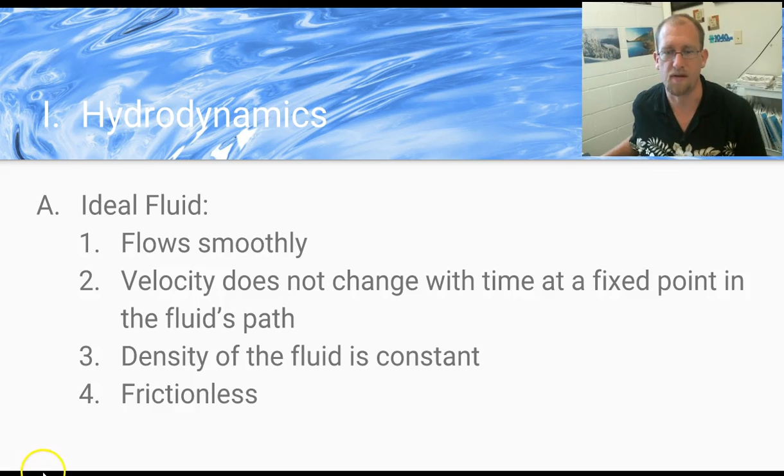We need to talk about types of flow. A streamline is a fictitious way of thinking, a model of how fluids flow, where we're going to draw some lines and say particles of the fluid move along these lines. Well, in truth, the particles of the fluid may be going all kinds of different directions, but we're going to draw lines for where the fluid particles flow, and we're going to call those streamlines. They don't exist, but they help make hydrodynamics easier to study.

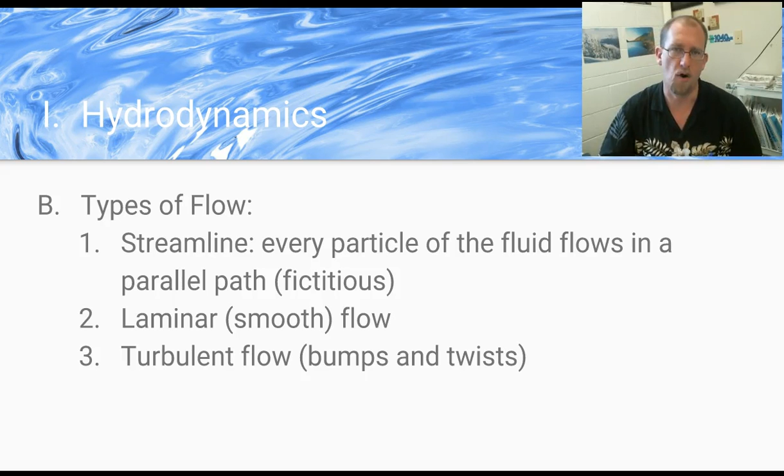When we talk about flow continuity, this is an important concept. Because an ideal fluid is uniformly dense and it doesn't have any gaps in it, it completely fills its container, right? If something is moving with a certain volume per minute past a point in a pipe, we're going to assume that everywhere in that pipe it's moving at the same volume per minute, because otherwise you would have water compacting at some point where it slows down, or water thinning out at some point as it speeds up. And it doesn't happen that way when a fluid moves uniformly. And so we have this principle of a continuous flow. Now there are some fluids like air where air can pile up or thin out, but liquids can't do that.

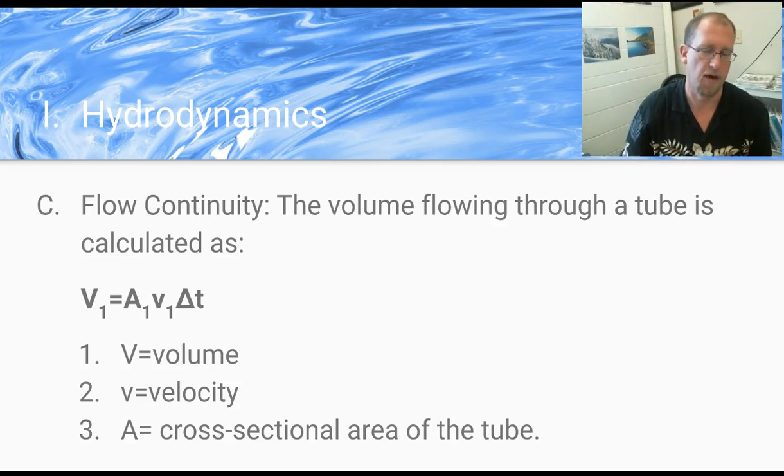And so this is very much like the volume of a cylinder or the volume of a prism. If you have the area of the base of the cylinder and its height, you know its volume. Similarly, the area of the pipe and then the time and the speed represent kind of the height concept. If you have the cross-sectional area of the tube and how fast things are moving through it, you can get the volume of water or the volume of air or the volume of something that has flown through the tube in that amount of time. Okay? Take a moment and look at that again if you need to understand it a little bit deeper.

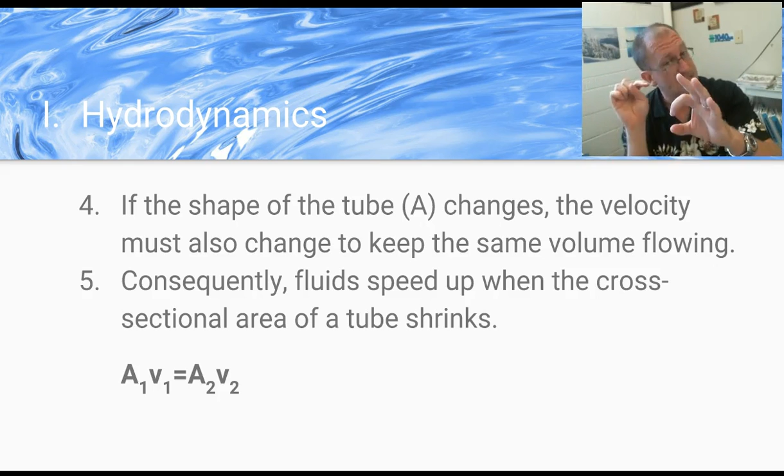The shape of the tube does not control the volume. So again, think about the fact that it's the same volume of water moving through the tube. If the tube is bigger, then the same volume can move slower. Think about that for a moment. You have a little pipe and a big pipe. Same volume of water moving through. The volume of water is going to move slower through a big pipe. It's going to move faster through a little pipe because the same volume has to get through a smaller space, but the same volume through in the unit of time. So it's going to go faster.

So the shape of the tube does not control the volume. The volume still moves. It controls the velocity, how fast it moves. The velocity will change to keep the same volume of water flowing. Consequently, fluids speed up when the cross-sectional area of the tube shrinks. So, got a formula for you.

The area on one part of the pipe times the velocity of the particles, the average velocity of particles at that point in the pipe, is equal to the area of a pipe in another place. Maybe the pipe has changed size, times the average velocity of the particles at that point in the pipe. So if I have a big pipe, I can have a small velocity. If I have a little pipe, I need to have a bigger velocity in order for them to still equal the same thing. Okay? All right.

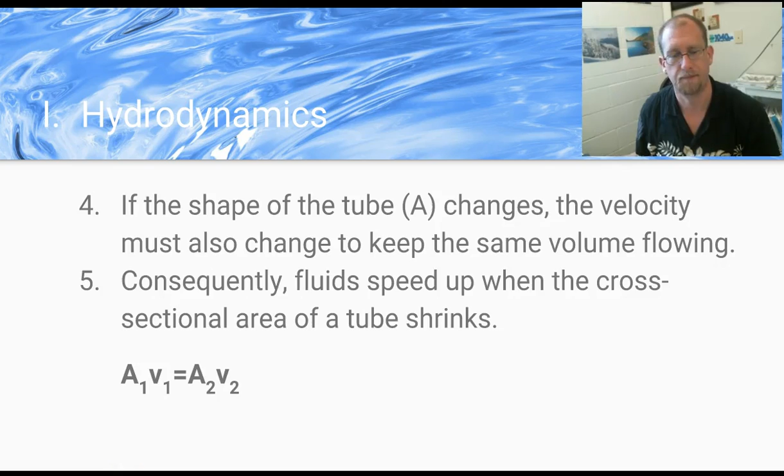I love potato cannons. I wish I could shoot a potato cannon with you. I was told by a police officer that I would go to jail if I did that, so I haven't done it here. But back in Arizona, where nobody cares if you fire potato cannons, I did it all the time. It's an awesome thing to do. You should go to Arizona and shoot a potato cannon too.

But in a basic potato cannon, there's a firing chamber of a larger dimension than the barrel to maximize the acceleration of the flow of gases against the potato. So the goal is to get this potato out the barrel of the gun really fast. I'm going to accelerate some gases in here by having an explosion, and then I'm going to make the gases go even faster by having the barrel be smaller than where the explosion was.

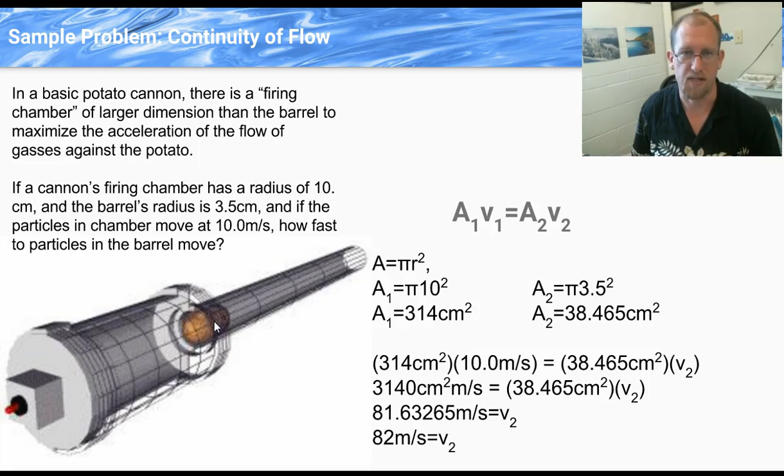So 82 meters per second is the velocity of particles in that barrel, which will turn into the velocity of my potato. 82 meters per second. It's a pretty awesome potato cannon, and that's typically the kind of stuff you get. Okay?

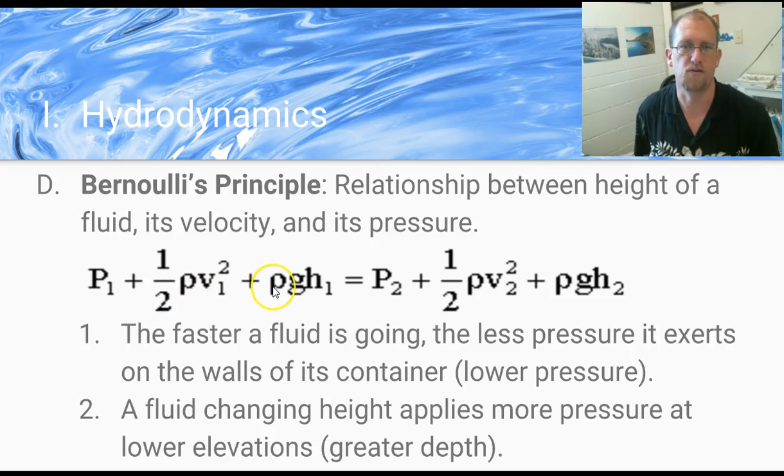Now you could of course change velocity and pressure at the same time, velocity and height at the same time, and I'll show you an example of that. But usually when you use Bernoulli's principle, you're going to be only fiddling with one thing and not the other. And so you can actually ignore one of these terms. If I give you a problem and the only thing that I am telling you is that the height changes, then you can just forget about the velocity term and just look at height and pressure. Or if I give you a pressure problem and tell you that velocity is changing but not height, you can forget that term, okay? So usually you don't have to mess with all three at one time. Let's look at an example.

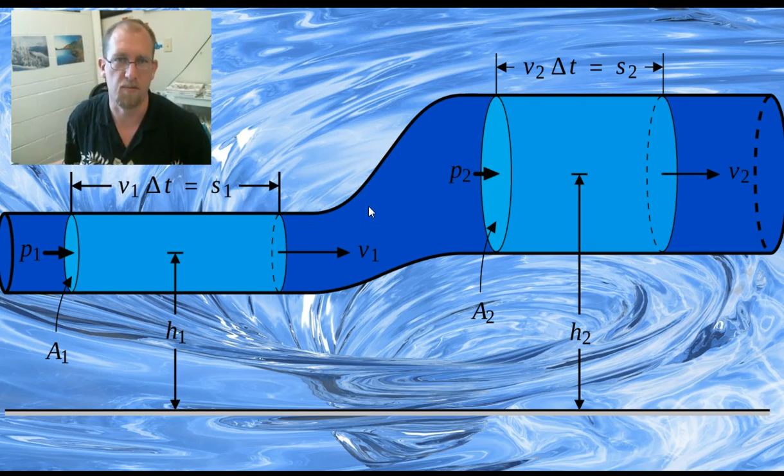Here we have an example where fluid is in a certain diameter, a certain cross-sectional area, which then we will be able to use to figure out its velocity, right? So I have the velocity information here, and I have the pressure at this point in the pipe. And then the fluid both rises and gets bigger. When it rises, pressure is going to drop. And when it gets bigger, pressure is going to rise because the speed slows down. So all of those things you would be able to throw into an equation and manipulate using Bernoulli's principle. Okay? That's the kind of stuff we're going to be doing.

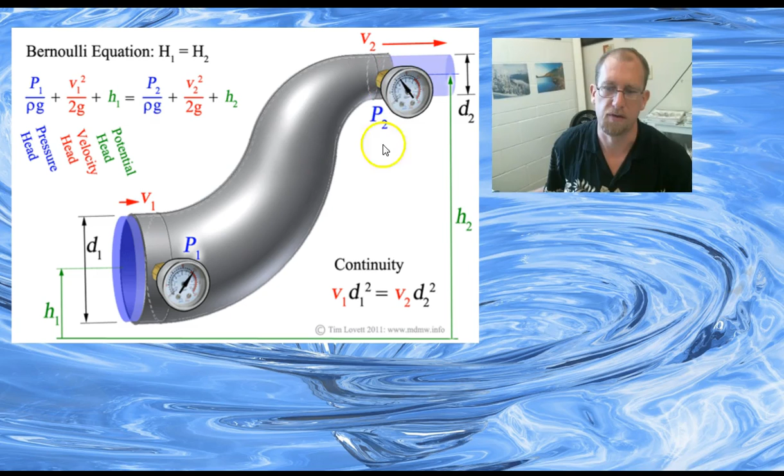Okay, Bernoulli's principle. This plays into lift. So fluid dynamics has a lot to do with airplanes and spacecraft designs and things of that nature. Because of Bernoulli's effect, fluids forced to go faster create areas of low pressure, and those areas of low pressure can be used to draw materials into that area of low pressure. Okay, so we have wings on airplanes, and the general idea of a wing is that it creates a vacuum above the wing that sucks the airplane up into the air, and that's why it can fly.

And that has to do with Bernoulli's principle. Okay, any device which generates lift in air is called an airfoil, and in a liquid we would call it a hydrofoil. It's the same thing. So I'm going to demonstrate Bernoulli's effect to you here, right? And this is a classic demonstration.

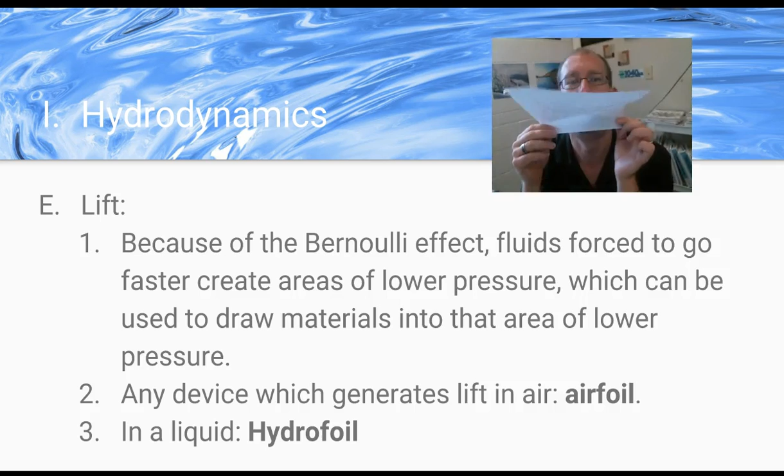I have this piece of paper hanging here, and right now the air above the paper and the air below the paper is not moving very much, and is moving at equally slow and boring speeds. But if I speed up the air above, the paper goes up. And the reason it went up is because as I sped up the air above the paper, I created an area of low pressure. And that area of low pressure drew the paper up into that area. So one more time. There you go, Bernoulli's principle.

Okay. There's another thing that comes into play with lift, and that is the Coanda effect. There you go, Coanda effect. I don't speak whatever language that is, but the Coanda effect talks about the fact that fluids flowing over a curved surface tend to follow that curvature, and so the air flowing over the top of a curved wing is going to keep following that curvature and compress the air underneath the wing. It's going to squish the air underneath the wing.

And then the third law pair force of pushing air down is going to push the thing pushing the air down up, right? Third law pair. So the air goes down, the wing goes up. That's another reason why there is lift. So let me show you a diagram that puts all that together.

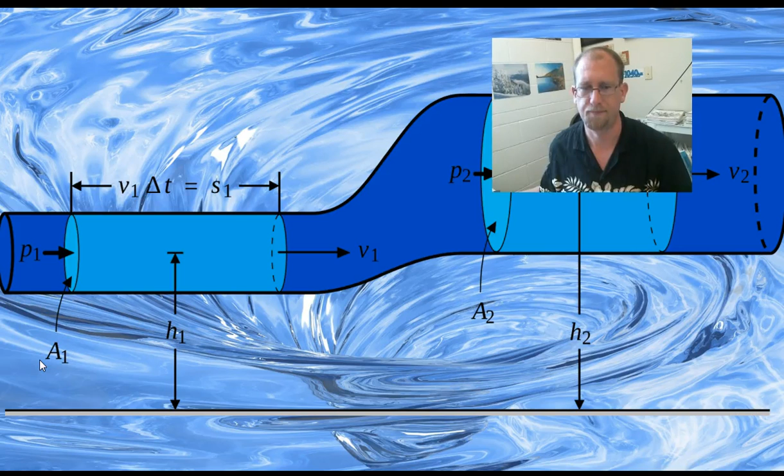That's not that one. There you go. There you go. Oh, not that kind of lift. Okay, just kidding. Here we go.

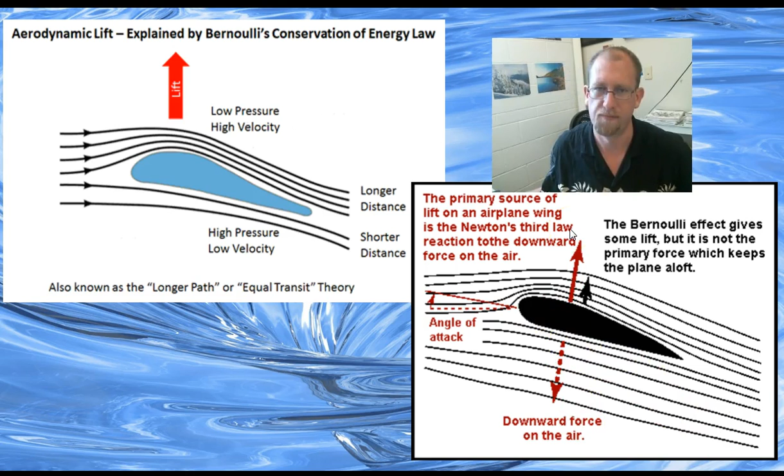Here's another picture of that. Air hits the wing and goes down. Air follows the wing and goes down. And so air goes down, wing goes up. Also, you can see the area of low pressure here created by the faster moving air. Faster moving air, low pressure, wing gets sucked into the low pressure. So that's the two reasons why wings work. And now you can build an airplane, right?

Okay. Real fluids versus imaginary ideal fluids. Real fluids do have intermolecular attractions, they do have friction, and they do have non-streamlined flow. So I just want to show you some things that have to do with real fluids, since we've been talking about pretend ones this whole time. Viscosity is a word that we use to measure the intermolecular attractions between particles of a fluid and their container. In other words, how sticky is the fluid? Does it stick to itself, and does it stick to its container? The greater the viscosity, the greater the stickiness, the more it resists flow. So viscosity is measured as a resistance to flow.

Okay, and we use a term called the coefficient of viscosity to talk about how much a fluid is resisting flow, just like the coefficient of friction. Only for the coefficient of friction we use mu, the lowercase m sound in Greek. Here we use eta, the lowercase short e sound, and it looks like the letter N with a too long tail, okay? But that is in fact the e sound in Greek. Eta, that's a lowercase eta, and we use that to represent the viscosity, how viscous a fluid is, okay?